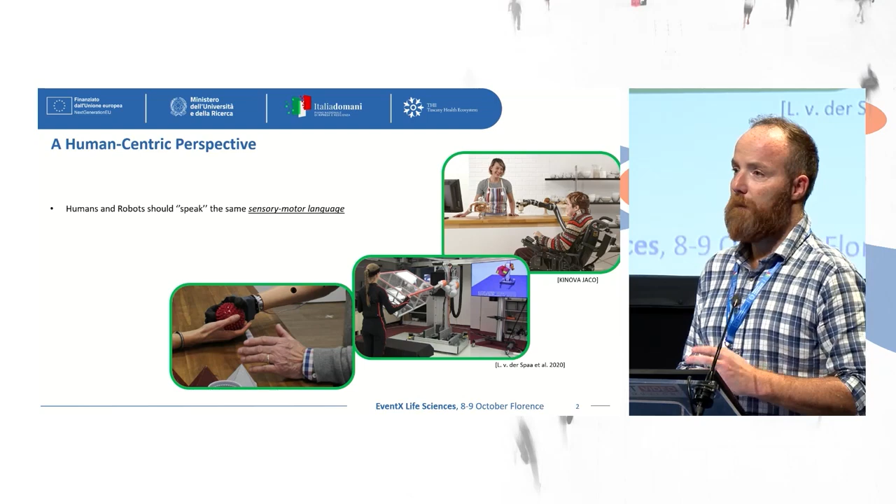And especially this language should cover both motion generation in terms of safety, predictability of motion, but also information retrieval, especially with the sense of touch, which is the sense that humans use mostly for interacting and exploring the environment. And we can take human inspiration as a driving factor for developing artificial systems that can fulfill these requirements.

So let's start from tactile information retrieval, and let's focus on what is called exteroception. So how to get information about the physical properties of external objects. And in my talk, I will focus more on object compliance, which is extremely important if we want to manipulate delicate objects and interact with deformable objects.

And basically, if we want, for example, to apply this line of thinking to a robotic prosthetic hand that can interact with the external environment, one first consideration we have to take into account is that human fingerpads deform with the environment. So we have soft deformable fingerpads, which can deform with the environment. This can enable multiplication and amplification of grasping capabilities.

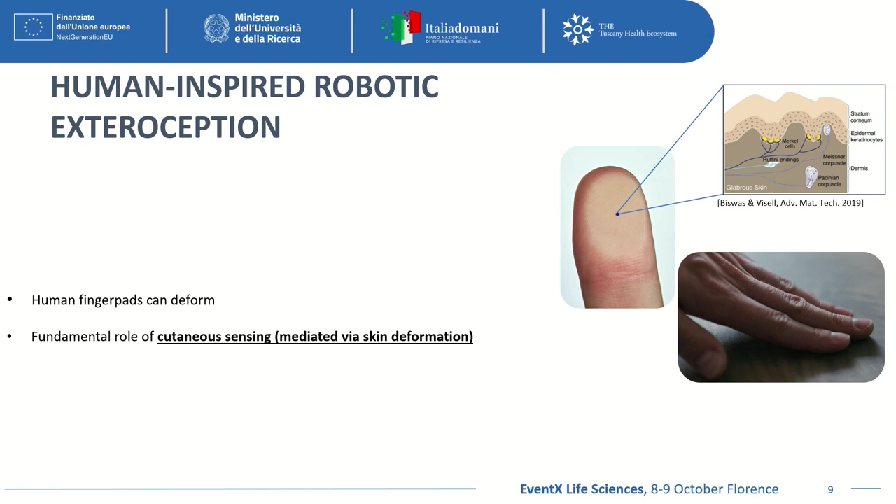But at the same time, the deformation of the human fingerpad is extremely important to retrieve information from the environment. And we have many sensors and different afferents that are activated. But if we want to translate this deformation onto the robotic side, it is worth mentioning a new class of sensors, which are the so-called soft optical tactile sensors.

Basically, these sensors consist of a membrane that can deform, and then they rely on information acquired by a camera embedded in the sensor. And there are different types of sensors which are based on this technology, like DIGIT or other types of sensor. But in this talk, I will focus on this biomimetic sensor, which is the TacTip. And this sensor is developed by the University of Bristol, and I will present a work that we have done in collaboration with the group of Professor Nathan Lepora.

So the nice thing is that we can exploit vision to retrieve contact information, and in robotics, these types of sensors are mainly used with deep learning methods. And these methods are extremely useful, of course, but they cannot encode the information in the way that humans actually do. So if I want to get this information from a robotic hand and deliver this information to the prosthesis user, for example, the encoding phase should be similar to the mechanisms that we use to perceive tactile information.

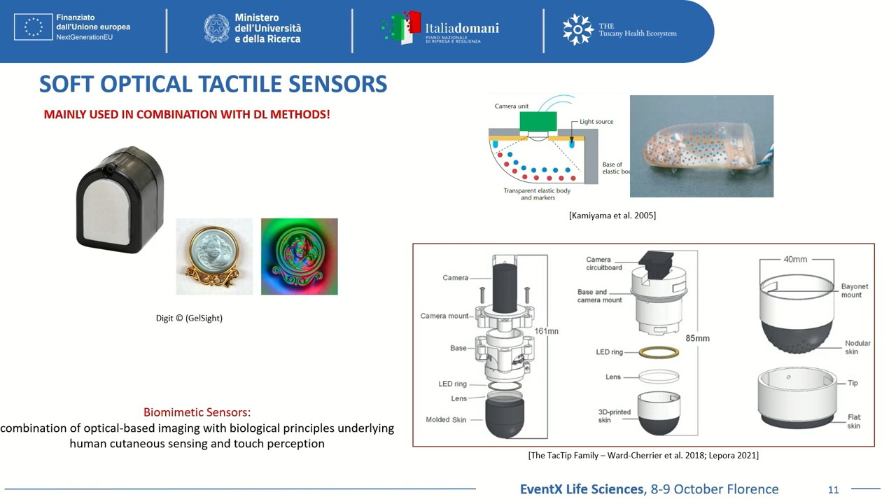This is what we did: try to use a model-based approach with this sensor. So this is an overview of the working principle of this sensor. There is an outer layer, rubber-like, which mimics the epidermis. And then we have an inner layer made of an elastomer gel.

And these two layers interdigitate with some ridges that are similar to what are called papillae in our skin. Basically, they act as a mechanical amplifier in our skin. And in this sensor, by tracking the displacement and the velocity of these ridges using a camera embedded in the sensor, we can infer information about the contact with the external object.

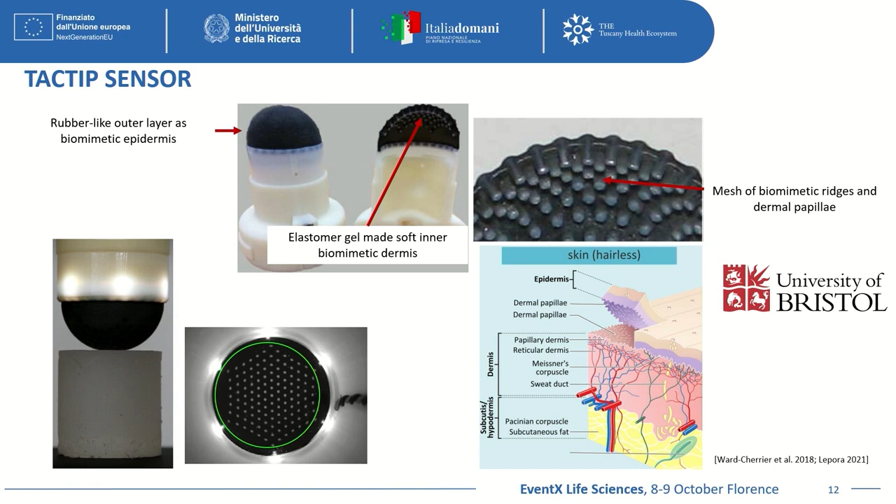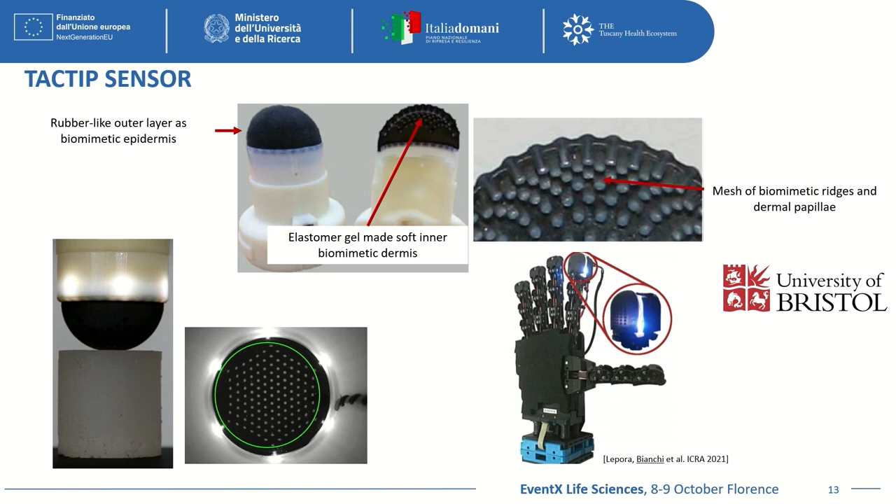We integrated this sensor in our soft robotic hand that we can also use in a version for prosthetic application. But here I want to discuss how to use computational models of human tactile perception with a soft optical biomimetic sensor.

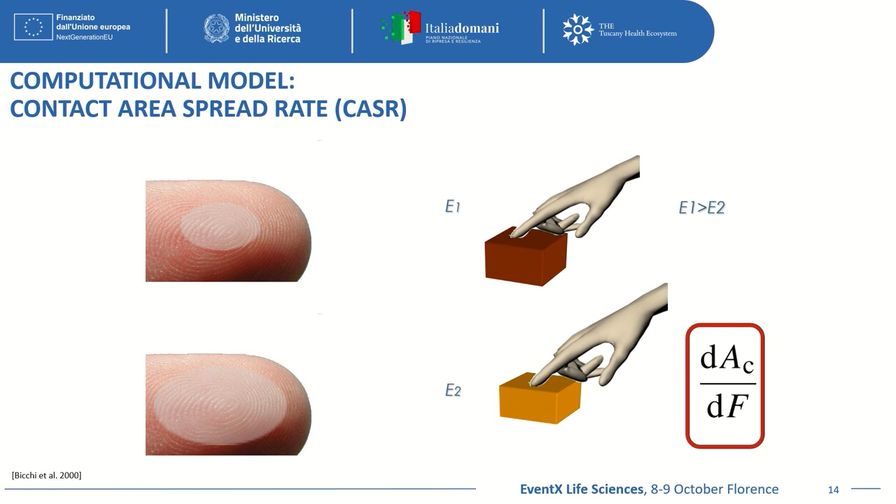So in humans, if we look at compliance perception, there is a paradigm which is well established, the contact area spread rate. So basically, if we interact with a very soft object, the growth of the area under increasing indenting force is larger compared to a harder object, because in the first case, the object wraps around the finger pad, so the area growth is faster.

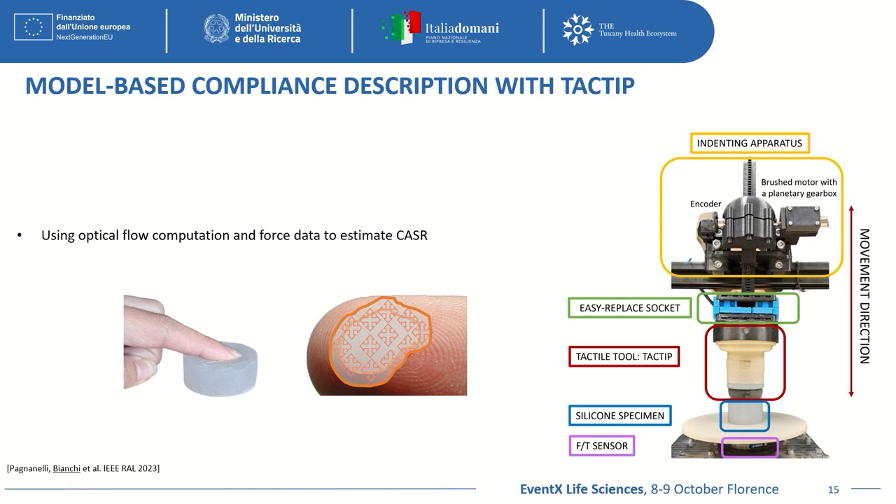So what we try to do is to implement the contact area spread rate with this soft optical tactile biomimetic sensor. And we use information from the camera that was integrated within the sensor. And basically the idea was to estimate the optic flow, which is basically the apparent motion patterns that we can acquire through vision. And we apply a well-established paradigm in vision, which is the time to contact.

So basically, the derivative of an area whose contour is related to same isobrightness properties can be retrieved by computing the divergence of the optic flow. And this is used in vision, for example, to infer the time to collision for navigation and so on.

If we combine this information with the force measurement that we can acquire by integrating a force sensor with our approach, we can relate the change of the contact area not with respect to time, but with respect to force, and estimate the contact area spread rate, which is the derivative of the contact area over the force.

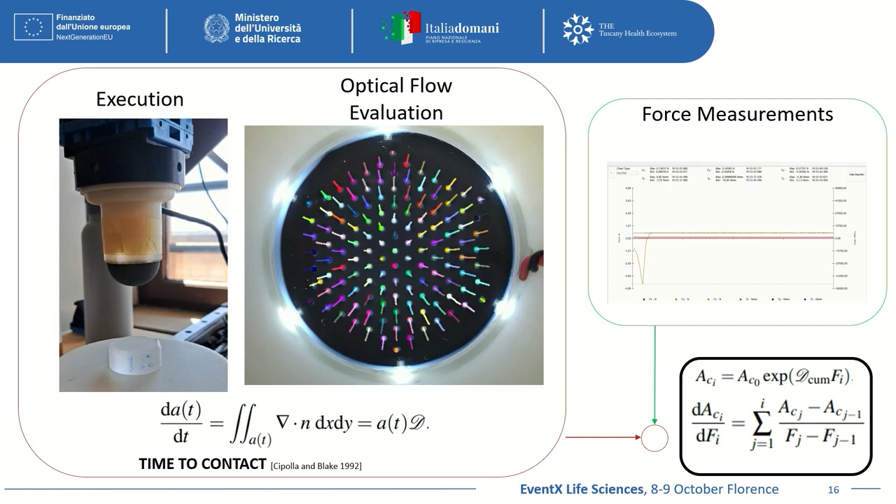And we perform experiments, and we found that with our approach, we can correctly discriminate different specimens with different stiffness. And also, if we have a model of the stiffness properties, of course, we tested with the same type of hyperelastic material, and the model was tailored to these properties, but we can generalize. We can estimate also new specimens with different stiffness to provide a discrimination between different compliance levels.

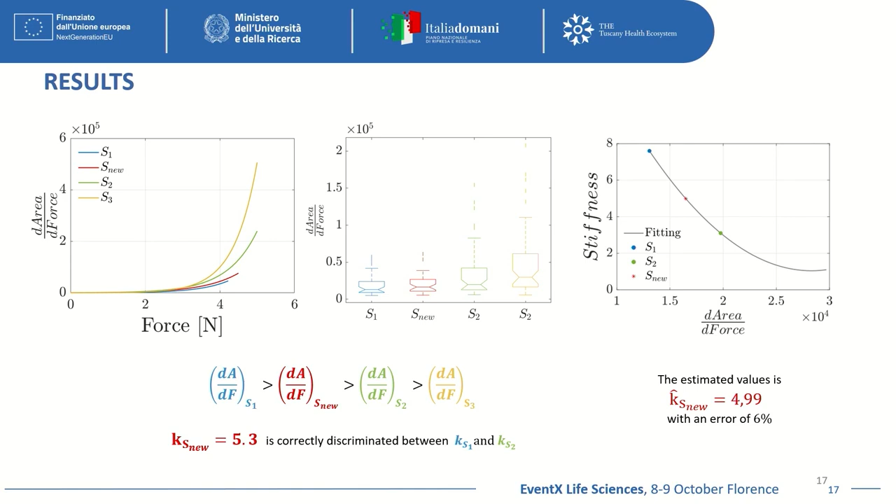And this is the first model-based approach based on a computational model of human touch used with the soft tactile optical sensor. In the project, we push further this quest for bio-aware design, starting from the observation that humans, during the exploration of soft deformable objects with different compliance properties, tend to adjust their muscular co-contraction.

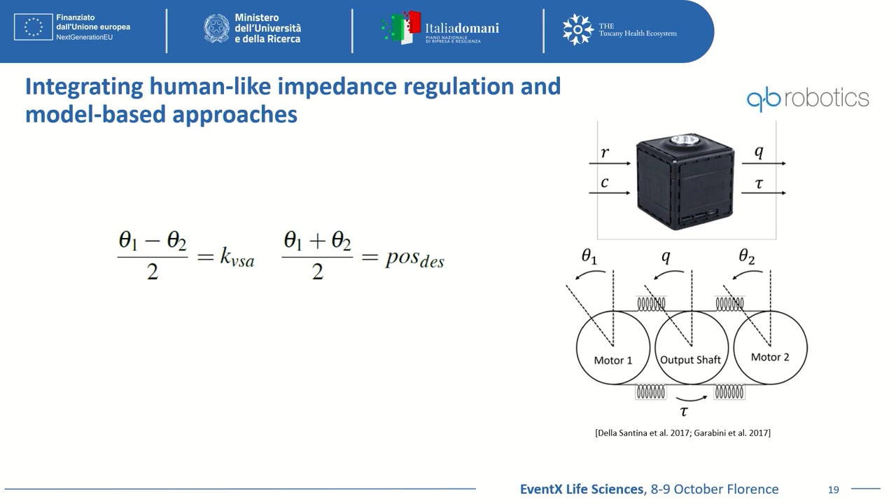So what we did was to use a variable stiffness actuator. This is developed by QB Robotics, which is also an SME involving THE, Spoke 9, as my group actually is. And basically this actuator behaves like human muscle, because there are two springs and we can change the resting position, but also the preloading of the spring. So we can control the position, but also vary the stiffness, like the agonistic-antagonistic approach that we use with our muscle.

And basically what we did was to record the co-contraction muscular patterns during the exploration of different deformable specimens in humans. And we use this EMG to map the control of the variable stiffness actuator. We first verified that different co-contraction profiles refer to different specimen exploration. And then we mapped this profile for the control of the variable stiffness actuator.

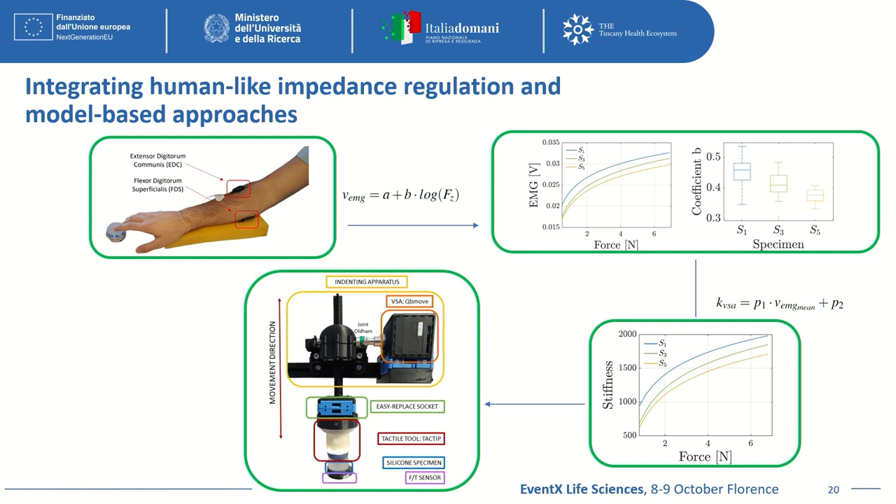And we found that this control integrated with the method that I previously presented, based on a computational model of tactile perception with the soft tactile optical sensor, increases dramatically the performance in terms of compliance discrimination. And this is something that can be integrated also in a robotic hand with agonistic-antagonistic behavior endowed with the soft tactile optical sensors and eventually used for prosthetics, for example, but also for rehabilitation and assistive applications.

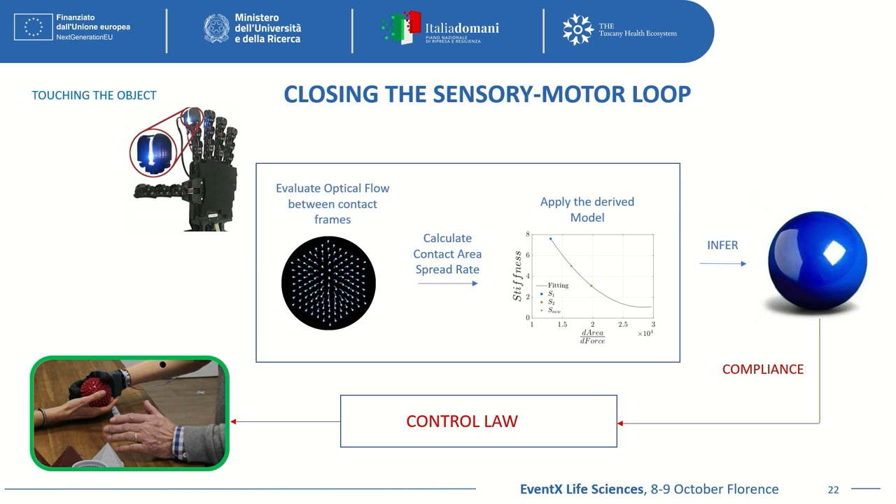So this is the idea: using the computational model of human touch plus embodied intelligence to infer material properties like compliance, and then use this information to provide the feedback, for example, to a prosthesis user. The second part is related to motion predictability. So basically, human-like motion generation in robotics is a well-known topic. There are different approaches based on minimum jerk or other learning methods.

But what my group did was to use a different approach. So the idea was we can use functional principal component analysis. Basically it is a functional generalization of principal component analysis. We have a basis of functions that can be combined to reconstruct a trajectory or the variation of a function over time. And we applied functional principal component analysis to study human motions for different degrees of freedom.

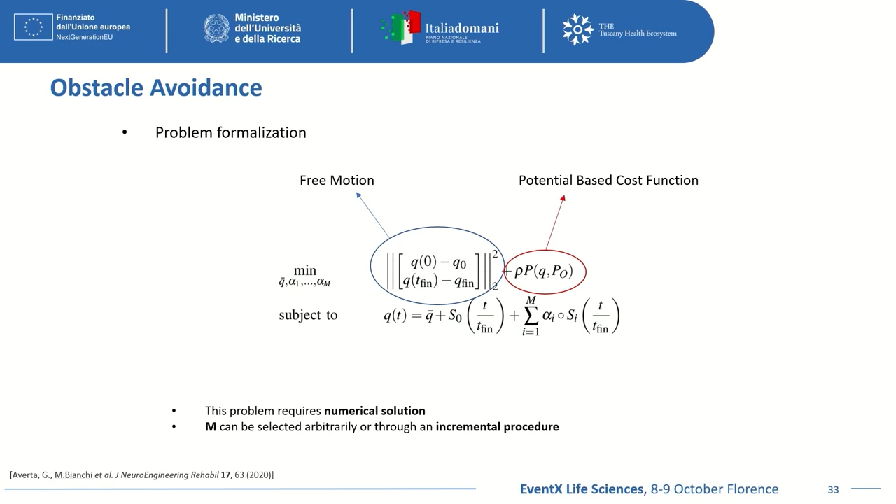If we have obstacles, of course, we have to include an additional part in the cost function, which is a classical potential-based cost function that brings the motion away from the obstacle, still subject to the structure of the motion retrieved from the functional principal components in humans. In this case, the solution is numerical, and we can increment the number of functional principal components to obtain the numerical solution. Everything is very, very nice. We have very low jerk values, bell-shaped velocity profiles, which are typical of human motion.

But we tested this in simulation. We use a kinematic model for our avatar, which is the same as the model that we use for extracting functional principal components from humans. But what if we want to apply this planning to an arbitrary redundant human-like robotic manipulator? There is a mapping that we have to account for. So the first solution that we propose is to work at the Cartesian level, and basically we implemented two Cartesian impedance controllers.

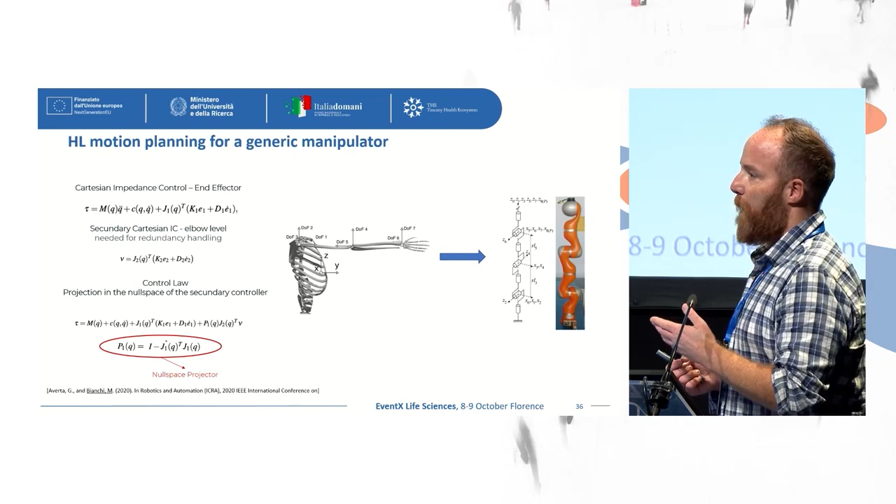In one case, the first controller minimized the distance between the paradigmatic arm that we use in simulation, with the same kinematics as the human arm, and the end effector of the robotic manipulator that we want to control. And the second controller is used to handle the redundancy and basically acts to reduce the distance between the position of the elbow of the paradigmatic kinematic model we use for planning and the actual kinematics of the robotic manipulator.

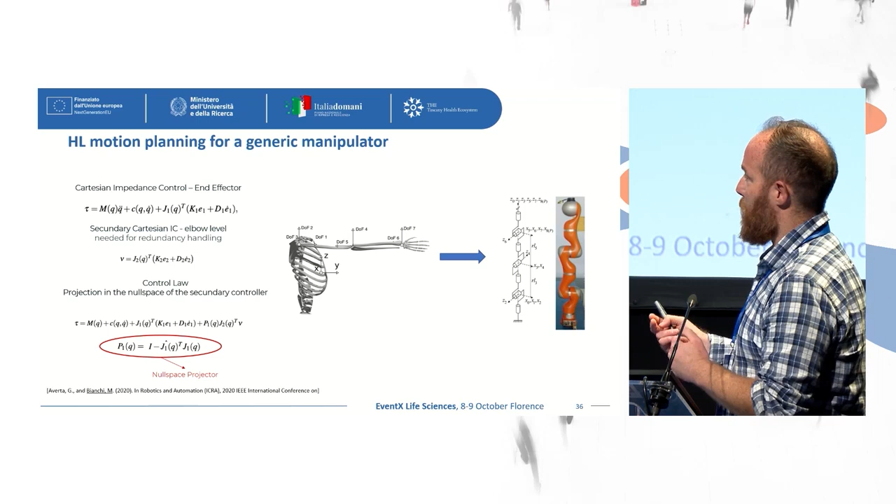The two controllers are decoupled because there is a projection in the null space of the secondary controller to make the effect decoupled. And this works in a good way, but of course there is a not negligible computational time to solve the optimization problem in presence of obstacles, and also to provide this kind of mapping. And this can take up to several seconds. And if I want a robotic manipulator that can interact real time with humans, this is not the best solution.

So what we do is to plan to apply the same approach to extract a functional principal component, not in the joint space, but in the Cartesian domain, so the end effector of the human arm. We can solve mapping and we can reduce the computational time because we can apply the functional principal component of our end effector, the human end effector, to the end effector of any robotic manipulator, redundant robotic manipulator.

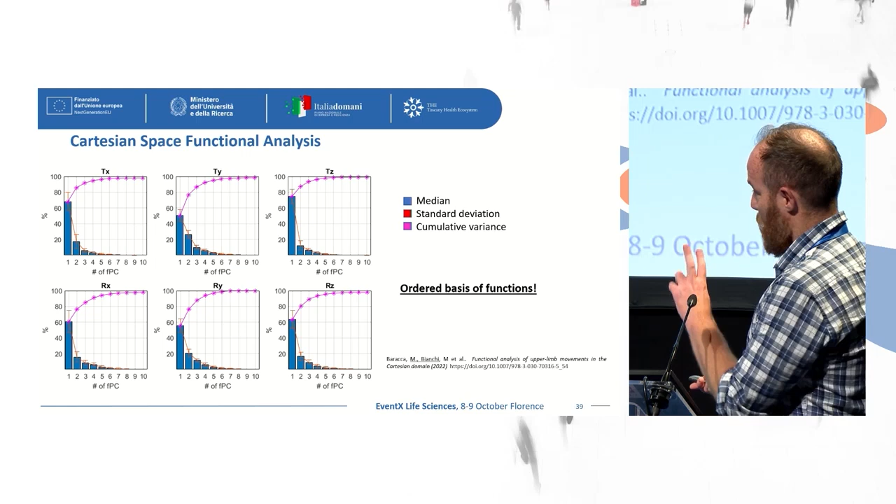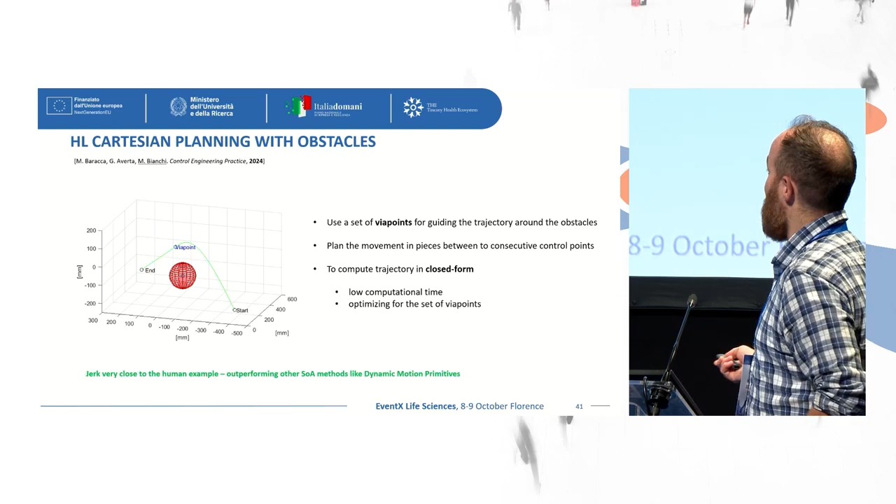If we have obstacles, we can use a set of via points for guiding the trajectory around the obstacle, and we can plan the movement in pieces between the consecutive control points. And also in this case, we can compute the trajectory in closed form. And in this case, it's no more a numerical procedure, and we have a low computational time, and we can optimize for the set of via points that we use. In this case, we obtain jerk values that are very close to human examples, and we prove that we can outperform other state-of-art methods like dynamic motion primitives for planning this human-like trajectory.

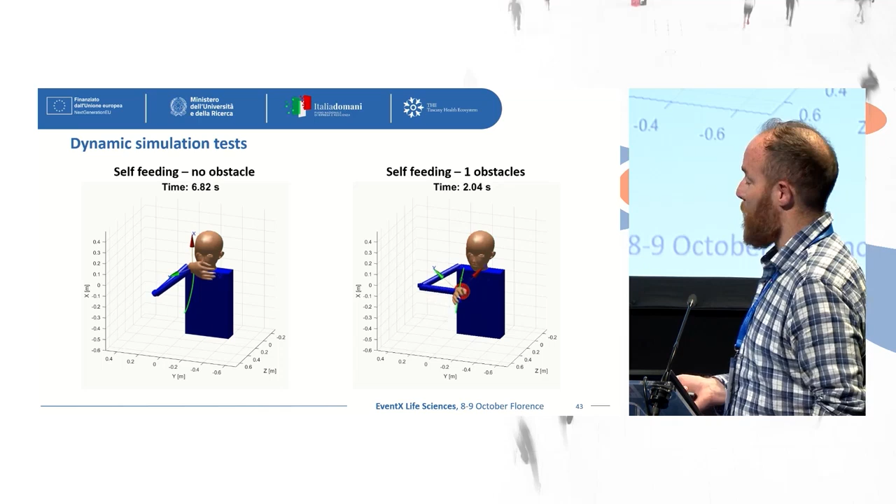And these are only some videos. We have to perform a more extensive test with robotic manipulators, but in this case, we have two tasks, self-feeding with obstacle and without obstacle. So I'm going to conclude.

So we can use a human-centric, bio-aware approach to enhance mutual awareness between humans and robots and the effectiveness of the interaction between humans and robots. And we can start from the implementation of a sensory motor language that can be understood by both the humans and the robots, both in the motion generation and in perception.

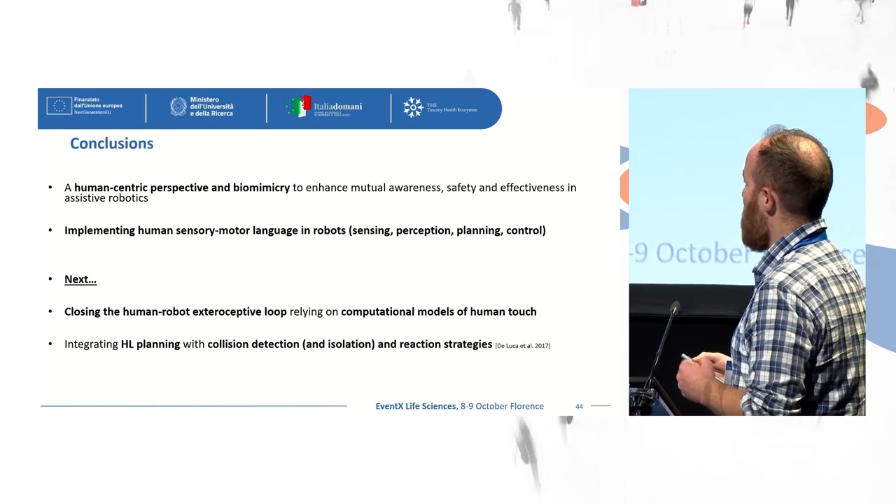And the next step could be closing the human-robot exteroceptive loop, relying on computational models of human touch to have information encoded in the same way that humans actually use for encoding and acquiring information about the environment, and the integration of human-like planning with other strategies for collision detection and reaction, like the generalized momentum.